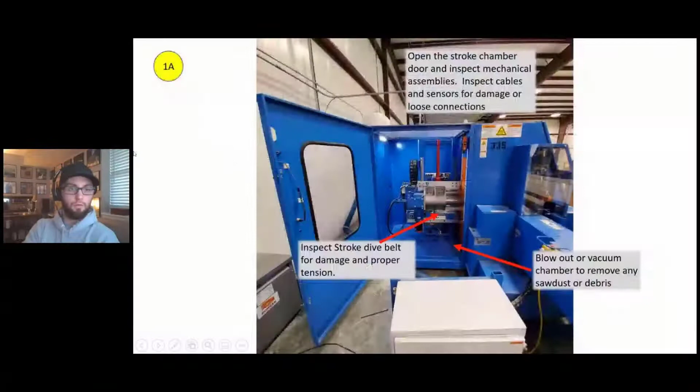Jumping right in, if you guys can see my screen. Eric Seeger and I made this presentation last year to help customers with their visual inspections of the blade saw. Each area of the saw is labeled 1, 2, 3, 4, 5. Should be pretty easy to go through.

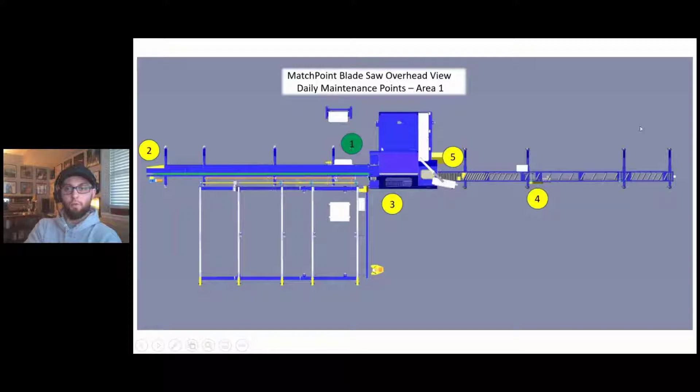So right now we're going to start back on the back side of the infeed rail behind the saw. This one right here. 1A: open the stroke chamber door and inspect mechanical assemblies, inspect cables and sensors for damage or loose connections.

The mechanical assemblies back here are the stroke, elevation, and angle. Right here with this red arrow pointing is the stroke belt. It says inspect the stroke drive belt for damage and proper tension. I like to keep this one at a 1/4 inch deflection up and down. The way I always check it, I go 1 foot off of the pulley and make sure I can move that belt a 1/4 inch up and down.

There are 4 linear bearings back here. I don't know if you guys can see my mouse or not, but these get greased once a week. That's in the PM manual.

This red tube in the back is the elevation jack screw. That only gets greased once a year.

Cables to keep an eye on: through this whole tube, there are about 4 cables that go into the saw head assembly, into the saw chamber. We want to make sure the insulation on those isn't cracking, and that it's not too tight. There are 2 clamps back here that hold it - make sure they're not too tight. Just want to make sure everything's clean and not in a bind in any way. This black chain up here with all the other cables in it, you want to make sure that there aren't any cables binding down where they exit out of that chain as well.

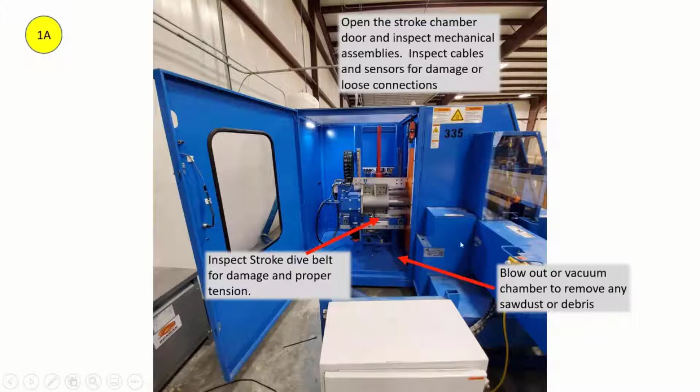Now we're looking at the idle end of the gripper where the infeed rail touches the saw. Open this door here, and if you have an older saw - I don't remember the frame number exactly - but these pulleys that these timing belts connect to, way back when, were made of aluminum. So if you have an aluminum pulley, I like to inspect that and make sure that the teeth on it aren't worn down. If that pulley wears down smooth, your printer encoder is actually on the other side of this. Your print will be off, and it's kind of tricky to figure out if you don't know what you're looking for.

This yellow block right here has got 24-volt wires going to it. I like to verify that this cable on the bottom is plugged in all the way and tight. You can verify the encoder cable on the other side is tight as well.

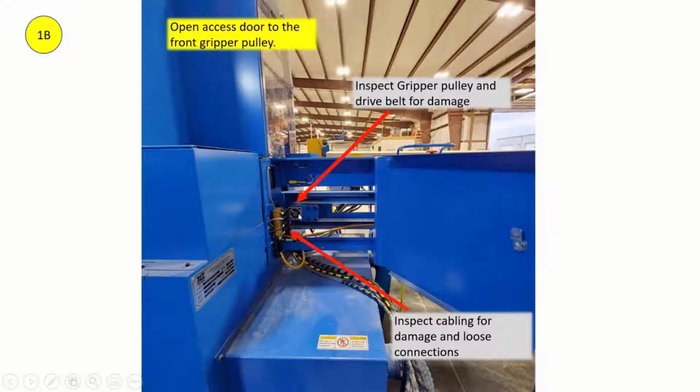Directly above that door, we have the top clamp assembly. You can remove the plexiglass guard - I like to take off the entire blue guard. It's just 4 or 5, 32nd Allen head bolts.

The note on the top right: check air cylinder sensors for tightness. You have your clamp/unclamp sensor - just verify that they're not slipping up and down.

Check shock absorbers for damage and proper operation. There are 4 shock absorbers on this clamp. The way to check and see if they are bad is push up on the plunger - if it doesn't come back out, it's obviously bad. There are 2 on top, 2 at the very bottom.

At the very bottom of that top clamp, you can see the orange part. We call it the ski.

A lot of the hardware loosens up over time because most saws, this clamp is boom, boom, boom, moving way harder than it should. To verify that all that hardware is present and tight.

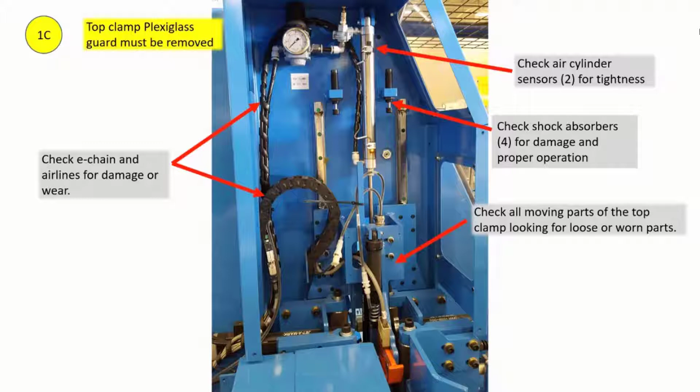The side clamp has needle valves as well. You can see one here and one just to the back of it. The regulator for it, we'll put up a video here in a second, is down in front of the saw.

You set that one to 30 PSI, and it's the same process. I'd have somebody at the screen clamping and unclamping it for me while I play with these 2 needle valves to get it to where it needs to be without slamming as hard as it can. You want to protect these bearings and, most importantly, that printer that's on this side clamp.

If you have a rear printer, you have these ink lines. It says inspect air lines and ink lines for damage. Just make sure they're not kinked up somewhere where it's going to get trapped by this clamp.

Inspect electrical connections for tightness. We have this solenoid up top. I've never seen one come loose, but it doesn't hurt to check and verify it's tight.

This print cable, you can, every once in a while, undo this cable. Probably find it's full of sawdust, blow it out, plug it back in. Just save yourself some intermittent print issues down the line.

Inspect side clamp air cylinder sensors for tightness and damage. Just like the top clamp, this cylinder has 2 sensors attached to it. So verify that they're not sliding around anywhere.

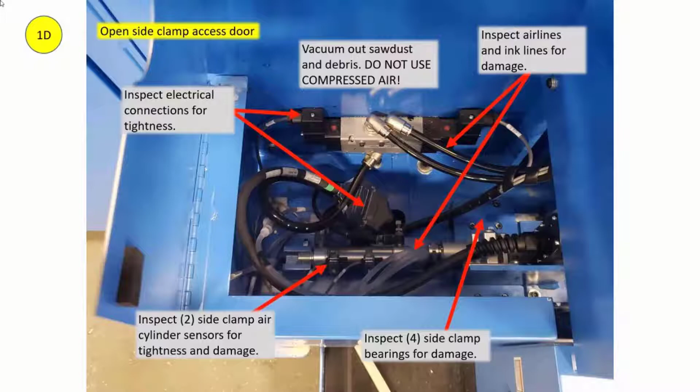On the back of the infeed rail, we have the pull cord for the gripper. It's just an e-stop. Make sure that this yellow cable at the bottom is tight. You can see this sight window with that little green arrow.

You want to adjust the tension of this cable on the right, this turnbuckle, to get that dead center. It's kind of a tricky one because if it's just barely off, it could trip an e-stop and be hard to troubleshoot intermittent.

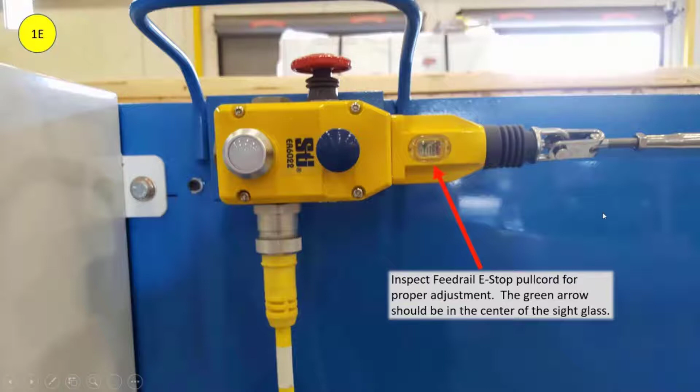On to the next one, we're going to be at the very end of the infeed rail to the gripper. All right, so at the end of the infeed rail, we open this door up and we can find our gripper assembly. Always verify that this home sensor cable is tight.

Make sure all these sensors and air lines, none of them are breaking or hanging in a weird spot where you might think they'll get snagged.

This E-chain has a tendency to come apart right here. Verify that it's put together. If it comes apart, you'll damage the cable and you have to run it all the way back to your saw. It's not fun.

Down here, we were talking about the aluminum pulleys. These wear smooth as well, and it'll let that belt skip teeth more than it should, and your parts will come out incorrect. So if you take one look with a flashlight and you see it's silver and smoothed out, it might be time to replace it.

The new ones are made of steel or black. I've never seen one fail either. So if you take a flashlight and you see the pulley is black, you should be fine.

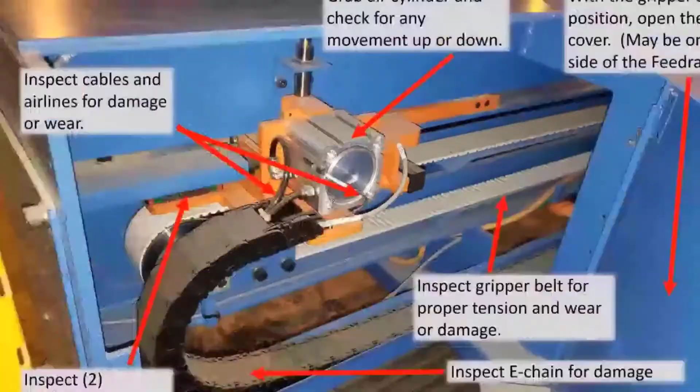These two linear bearings on the gripper are the easiest ones to check on the saw. I like to grab this silver air cylinder right here and just shake it up and down. If it's got any play at all in it, you know those bearings are probably bad.

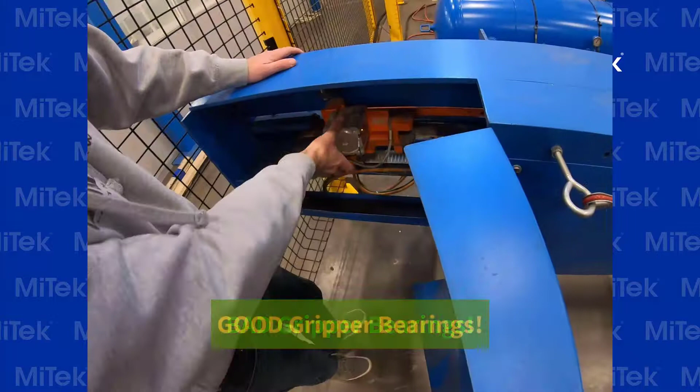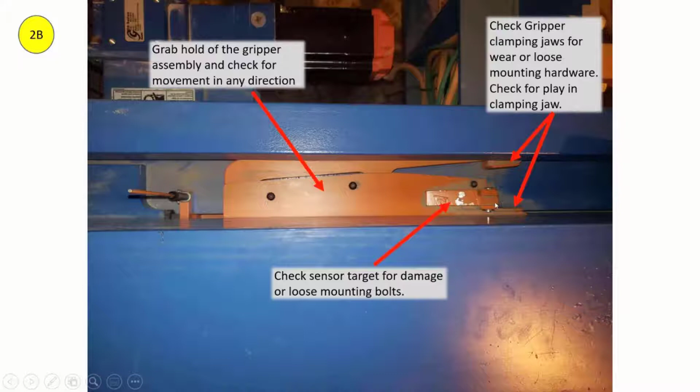A lot of you guys recognize this orange piece up here at the very front, the little flipper deal with the magnet in it. We call it the sensor target. That thing takes a lot of abuse too, smacking into the end of boards.

Always keep one or two of them on hand, because if they break, you're down. You can re-weld them, but I've never seen one re-welded last more than a month. So it's always something you want to keep on the shelf.

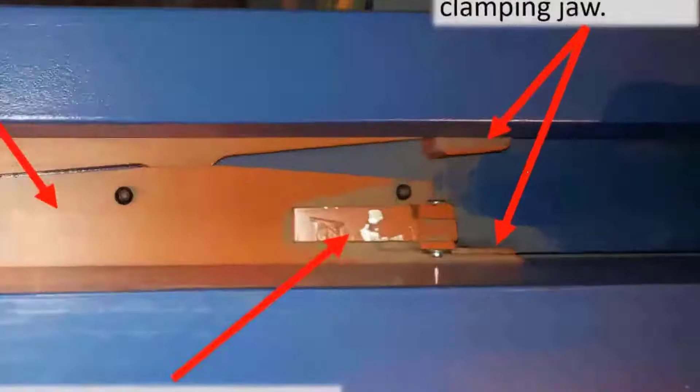These little pads too, let me go back here. These pads with these little grooves on them, you want to keep a set of those on the shelf as well.

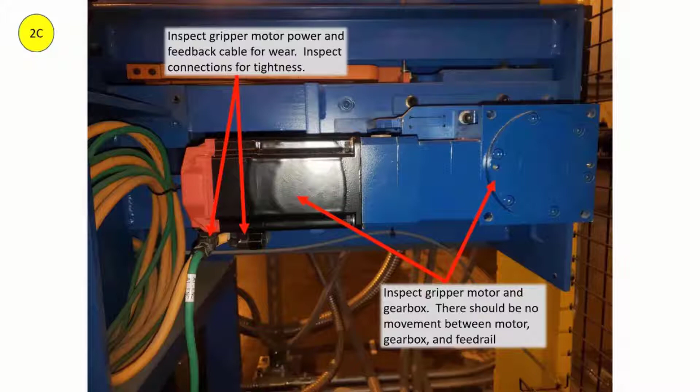Opposite of that door that we had open, we have the gripper gearbox and the servo motor. At the end of this servo motor, there's a little green cable. I had one come unplugged on me one day, and it took me about 15 minutes to figure out what the issue was. It's just a little twist lock that goes on there. I've only had one come off, but make sure it's on there tight, as well as that orange one.

Between the servo motor and the gearbox, there's a Lovejoy coupler. Torque on it is 89 inch-pounds. Not very heavy, but over time, if it loosens up, imagine that gripper coming in to grab a 2x12. It's a lot of force grabbing a wet 2x12. That coupler can slip, and your parts could be off a foot or more.

So if you call into customer service and your parts are off a foot or more, it's usually where we'll point you. It's a pretty handy page on our website showing you exactly what to check for gripper slippage. There's another coupler on the output side of that gearbox. I don't think I've ever seen one slip. It's a lot beefier than that small one.

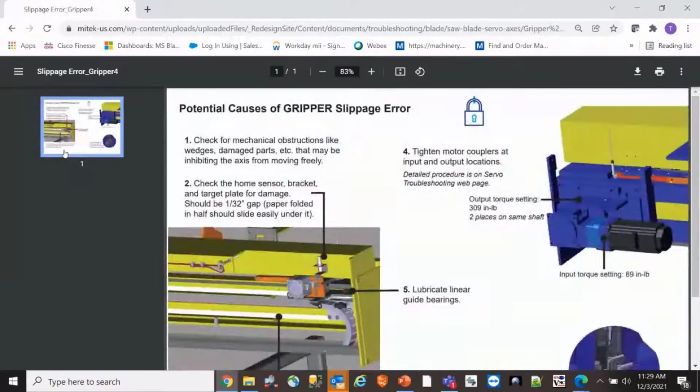On our website, mitek-us.com, you can find a lot of troubleshooting information about the blade saw. The 1-800 number, our help desk, actually directs you here for a few things. Most notably, for gripper and nozzle slippage, my favorite, the gripper slippage error graphic, gives you a step-by-step of things to check.

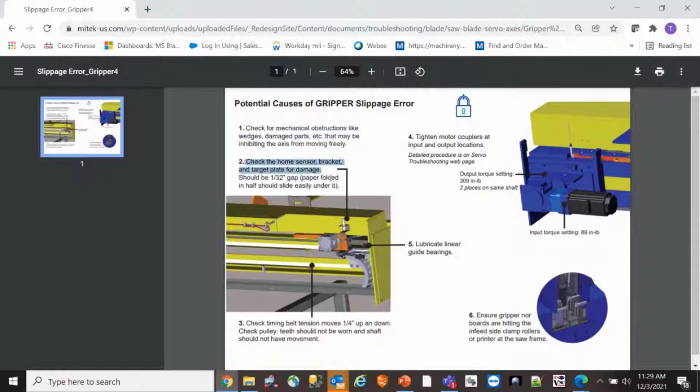See right here, this is that coupler I was talking about, the 89 inch-pounds. Then that bigger coupler is 309 inch-pounds. I really don't memorize these numbers, I always come back here and double check because I don't trust myself. But it gives you step-by-step, number one is the most likely thing to be wrong, then check number two, number three. There's so many things on this website that are underutilized.

Stroke slippage. It's pretty much the same steps, but a different axis. It's got pictures, just a fantastic resource for troubleshooting.

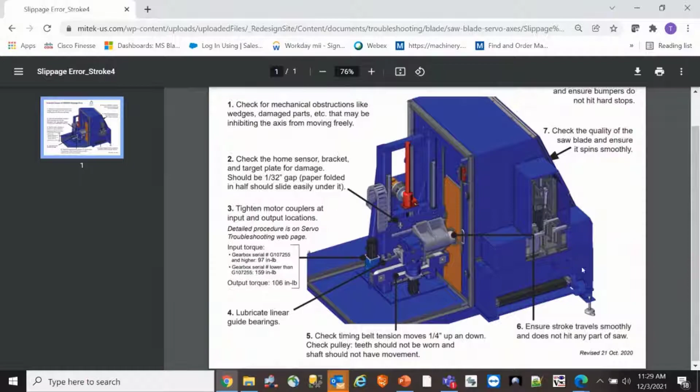So in the saw chamber, one thing I like to do is grab the blade and spin it to see if I can see it wobbling or anything. If it's wobbling really bad, you should be able to hear it while you're cutting. I hope you would. And if you do hear it making a noise, stop cutting until it's figured out.

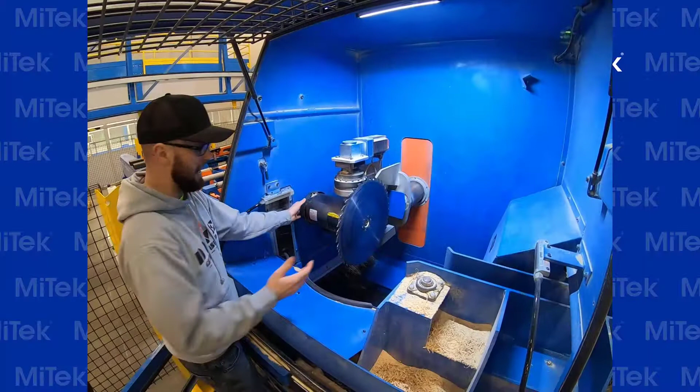Something else with the saw head, I like to grab the back of the motor and the front of the saw blade to see if I can find any slop in it rotating left or right. It's really, really bad to have any slop in this. So the way we check it, we try and rotate the blade this way to see if it has any play at all, which it doesn't. This one does not. If it did, you would feel about a quarter of an inch left or right slop.

Between the gearbox on top of the saw head and the black motor on the back, these are for the bevel, which is rotating this way. There's a small Lovejoy coupler, 2 pieces of metal with a rubber bushing between them. That rubber bushing, if it wears out, it goes away. Now you've got mechanical slop where it's kick, kick, kick, kick. It's usually about 1/4 to 1/2 inch you can feel moving left to right.

It's very bad. Your saw blade won't be cutting true into the board. Could cause more damage to the saw motor bearing, the shaft, the hub, things we do not want to damage. And bevel, if your bevel's off and you try to calibrate the rest of the machine, all of your other calibrations will be off. Bevel is super important. I don't like to mess with it at all. Take every precaution I can.

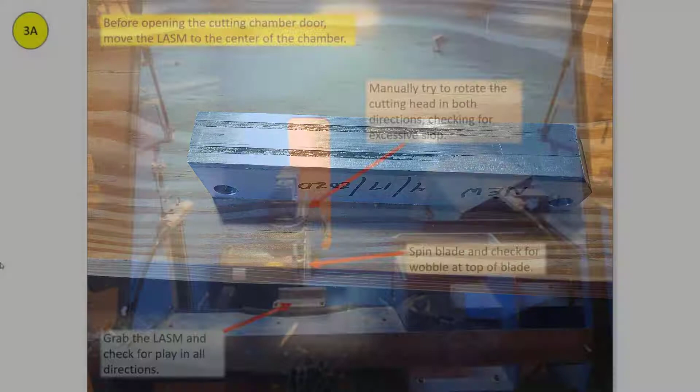Looking down at the LASM, that silver jaw directly in front of the saw blade, the jaw closest to us, we call that the fixed jaw. The other jaw is the one that actually moves whenever it clamps. That fixed jaw, it'll have 2 grooves in it running along it, just wear marks. If your LASM is completely smooth, it's probably time to replace that jaw, because that jaw is what we align the entire infeed rail to whenever we install it. And the outfeed clamp is in line with it as well.

If you have bad bearings, I've had it a few times where I could grab that LASM jaw and I could feel it rocking back and forth, just like we were grabbing the gripper and moving it up and down. But there's an easier way to check for bad LASM bearings.

Over here on the very left side of the screen, you see this blue donut encoder. Rarely, but it has happened, that cable plugged into the bottom of it has come loose. Just verify that's tight. Your saw is probably a lot dirtier than this one we're looking at. A lot of ink and sawdust built up in this area. I like to keep it blown out, because if you have to replace the cable, it's not fun to dig it out of ink and concrete at the same time.

These ink bottles down at the bottom, I like to check for air leaks. The regulator to the right of the bottles, the sticker says 12 psi max. If you have all the bells and whistles on this saw, 2 32-valve print heads and a 7-valve edge, you can run 12 psi. If you've got one 16-valve printer in the front, you don't need 12 psi to run the whole thing. So you can be a lot easier on your printers, run like 7 or 8. As long as ink's coming out and it's legible, you have enough air pressure.

If you want to check to see if your LASM bearings are bad, a good tell is looking at the ends of the bearings, the dust cap, the green red portion of it. If you see that it's flared out or broken up, I will almost guarantee that bearing is bad. So if you take that bearing out of that assembly and slide it over, you should feel it flopping around. Bad bearing. Bad bearings will give you inconsistent parts. It's no bueno.

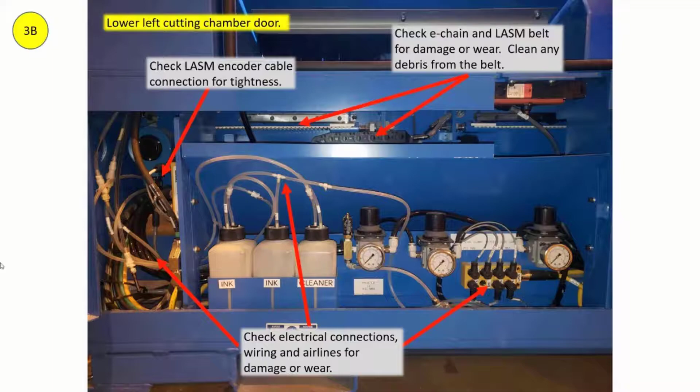All right, now on the drive end of the LASM, all the way to the right, we have our LASM motor, LASM gearbox. There's not really too much to check over here. I always verify the home sensor's tight, the cable going to it. Blow out this whole area because there's a lot of cables running through there, and if you need to replace one, it's easier on a clean saw.

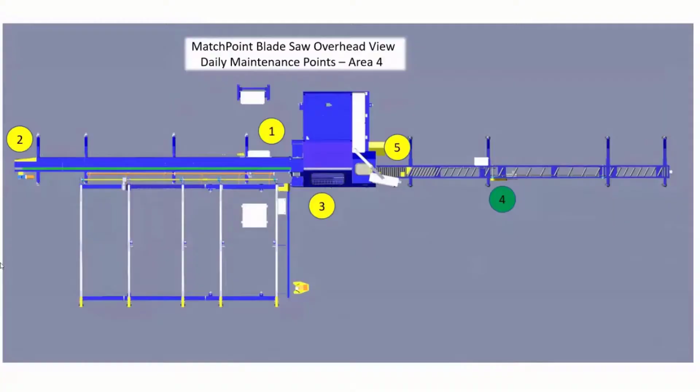Instead of replacing them all, you can get away with taking those pulleys off, flipping them 180 degrees and reinstalling them, and get another 5 years out of them. It's good practice to get under here every once in a while and make sure there are no cables in the way of the belt. Make sure the belt tension's correct so it's not slapping into a cable, because you have a couple E-stop cables running through here. If you mess up that cable, you're down all day.

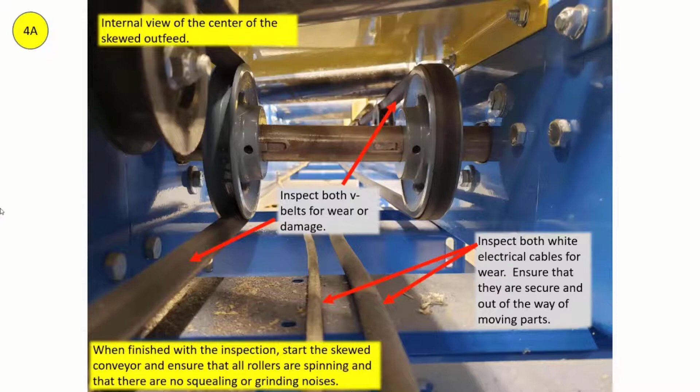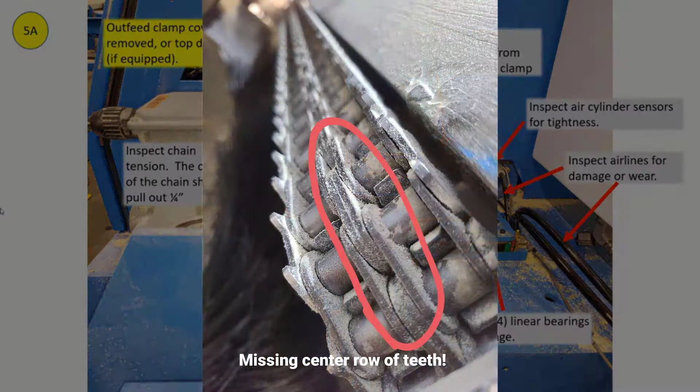All right, number 5, the electrical cabinet. Oh no, we're going to talk about the outfeed clamp, my favorite. So this outfeed chain down here on the right should have 3 rows of teeth on it. I've seen manufacturer defects where they only have the outer 2 rows. No matter how much you adjust this clamp, you're going to have problems ejecting parts. So go check out your outfeed chain, make sure it's got that center row of teeth on it as well, to make sure you're giving yourself the best shot.

Tension on this chain, people kind of vary on how they like it. Some people like 1/4 of an inch. I like to grab it in the center and pull it out just under 1 full inch. That's the tension that I set it to. On the back here, you can see 4 more linear bearings and another air cylinder. Now, with all of these clamps, they have needle valves to help dampen these clamps at the end of their movement.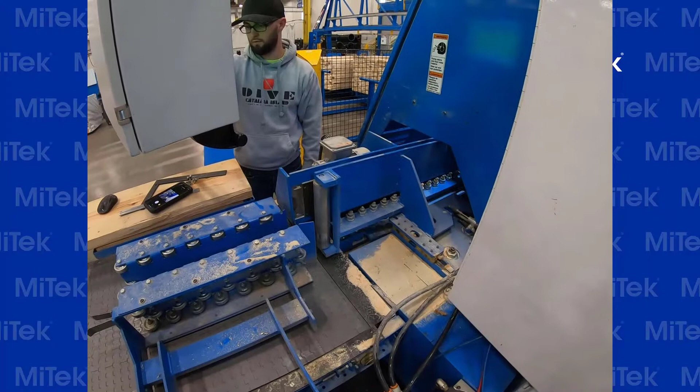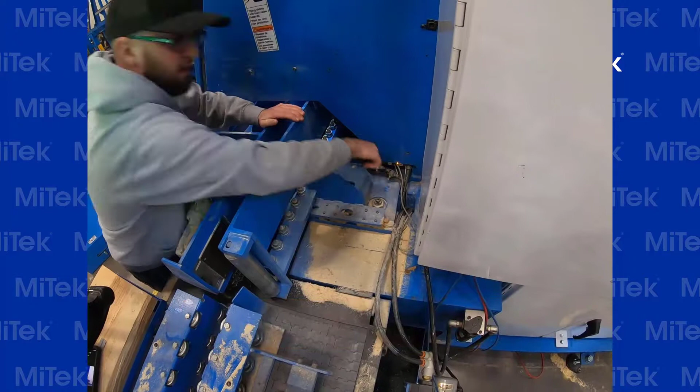So if you go out to your saw right now and you have the operator clamp and unclamp, I'll almost promise that outfeed clamp's going boom, boom, boom. I think we have a video we can lay out in front of it. I think that's enough to get the idea. Oh my gosh. Someone's got these well beyond finger tight. And then now, I think it looks good. Let me

These needle valves will help prolong the life of so many parts on these clamps. The top clamp, side clamp, outfeed clamp. They're so easy to adjust. Verify your clamp pressure, and have somebody running the clamp button while you mess with these needle valves. Just dampen the end of the clamp's travel, so it's not full bore metal on metal slamming into stuff. You'd be surprised how much better your saw will run, and how much longer it'll run.